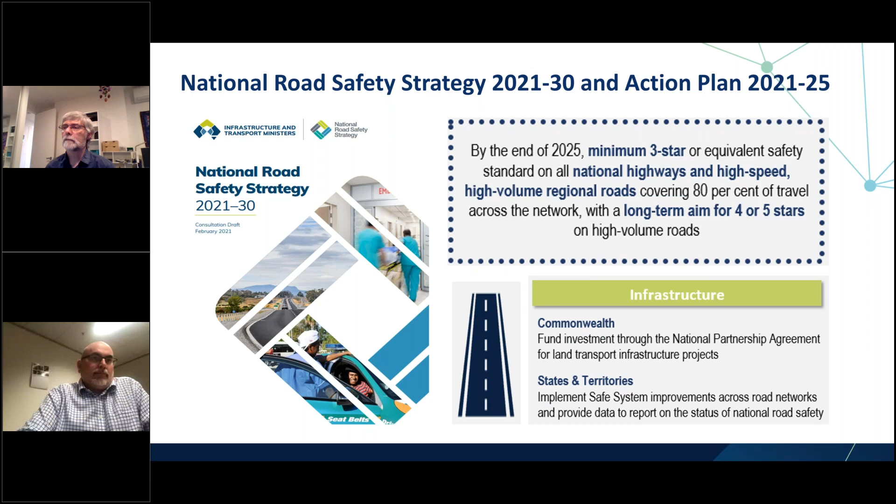As part of trying to establish baselines and understand where we are at now, the Commonwealth has stood up the National Road Safety Data Hub. And as part of that, you can see that data is key. It's a key feature to help us actually understand where we're at and to understand the gaps and the measures and the investment that we need in order to get to where we want to go.

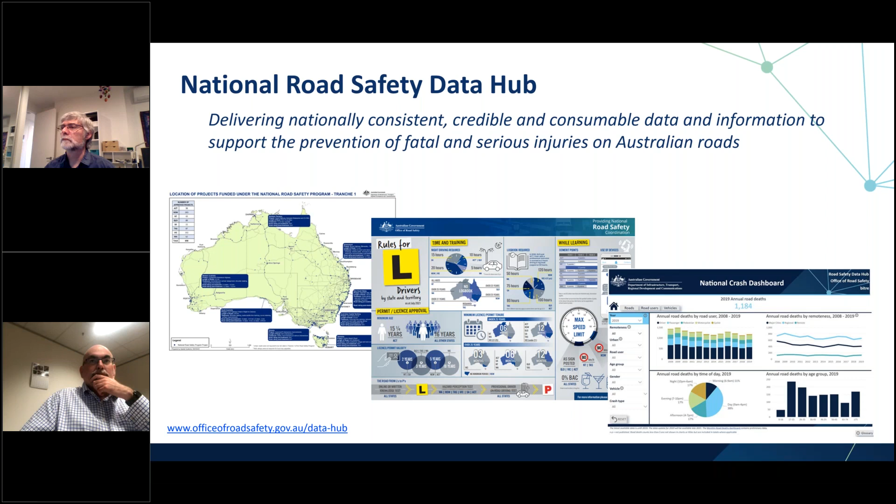So now I'm going to start throwing questions to Mark, given he's head of the road safety program. And Mark, first and foremost, perhaps you might like to actually tell us what's the basis of standing up the road safety program?

So, Gabby, as you mentioned, we're implementing the new strategy and action plan, and with that, we've got a large legacy network that has become or is ill-equipped to meet all the expectations that we have of road safety going forward. The goal of the program is to retrofit the highest risk regional corridors with low cost, easy to implement safety interventions, and also in urban areas to look at providing greater protection for vulnerable road users in those spaces. So things like shared paths, separated bike paths, etc.

We've got an aim in the program, as you mentioned, is to lift all the roads to a minimum of a 3-star safety rating, and we'll talk a little bit later on how we look at that safety rating and assess it from what we get from the states. The other important part of the program is making sure that we get a good geographic spread of the works so that they actually are spread across the entire country and also in regional and urban areas.

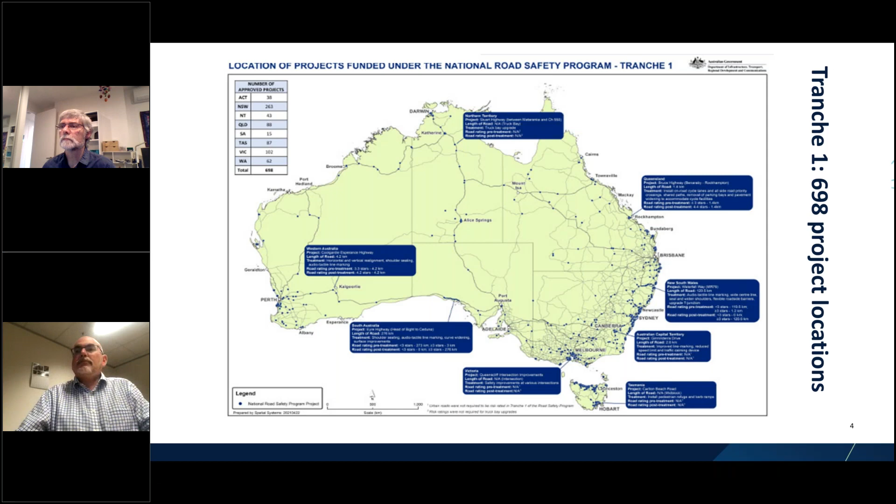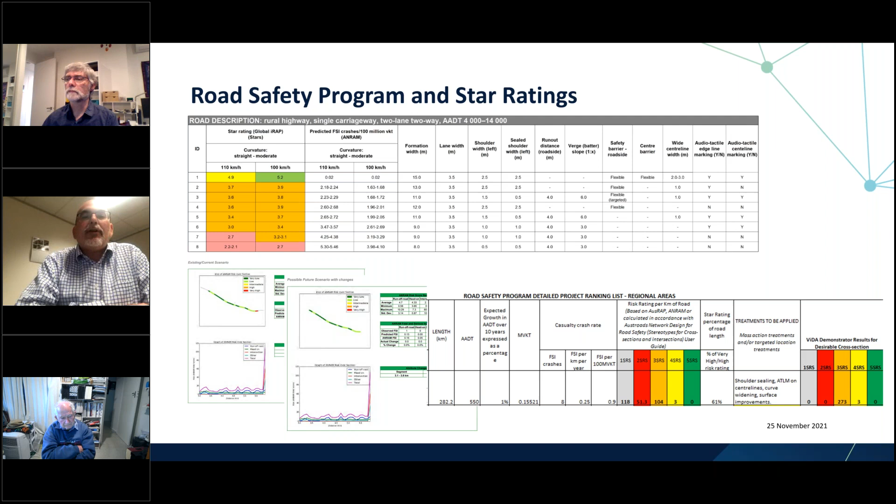I think it's worth noting there's been huge interest from the Parliament and the Joint Select Committee and the Senate around how this program is operating, and about the types of savings and the best opportunities to reduce fatal and serious injury crashes.

Yeah, so at the end of the program, at the end of each tranche, we expect a post-completion report to be provided from the states and territories for the works they've done, basically to show us that they have done what they said they would do.

What we're asking in that is, when they put in their bids for the work, they provide us their before assessment of the crash risk, then provide the after assessment. But again, that's before the work has been done. So we're also asking, once you've completed it, do another risk assessment so we can see whether you've actually met those star ratings, or in some cases gone higher, or whether more work needs to be done to increase it.

And could there be an actual spot issue on the corridor as well? This one is a good example.

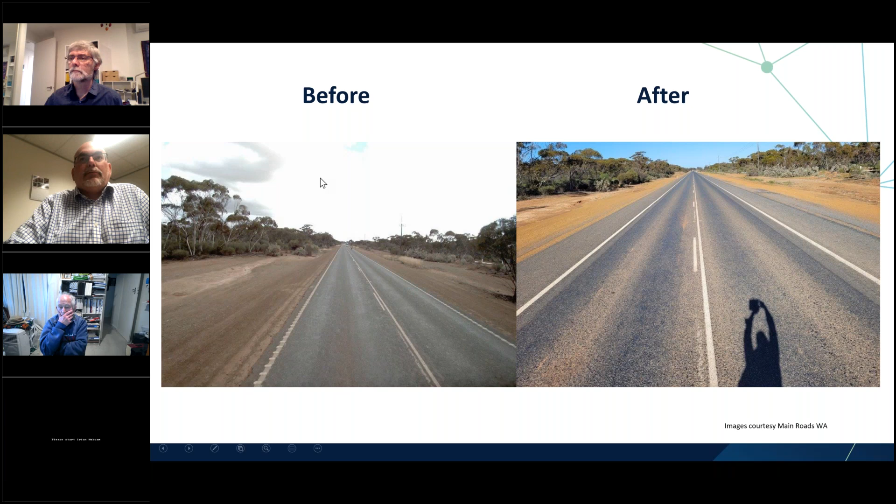Thanks, Mark. There's a comment there from Max Cameron about if sections are not chosen by BCR analysis, how can the program guarantee value for money? I think it's really, you know, some of these have a high crash risk, but don't have that crash data to back it up.

We're looking at the collective risk. We're not looking at black spots - there is a black spot fund. So this is about saying we know with this legacy road system, the risk is high. The crashes that happen are quite random, the fatal crashes. So what we want to do is overall reduce the risk and improve the service of the road, broadly. So that's why we're not putting a BCR on it, and otherwise some of these roads would never get funded, and yet you can see the huge lengths of kilometres being done with the availability of this funding. So we're really proud of that, and we really want to move, not just from 3 stars but higher than that, but obviously that's going to take time and there's a huge number of kilometres to go.

And just on the value for money, Gabby, I think there's two factors in there. There's the BCR, we've shown the value for money, but there's also, we do assess to make sure that the works themselves that are being proposed and the cost of those works are within a value for money estimate as well - from a more general procurement side, that the value for money in the works actually being undertaken is correct.

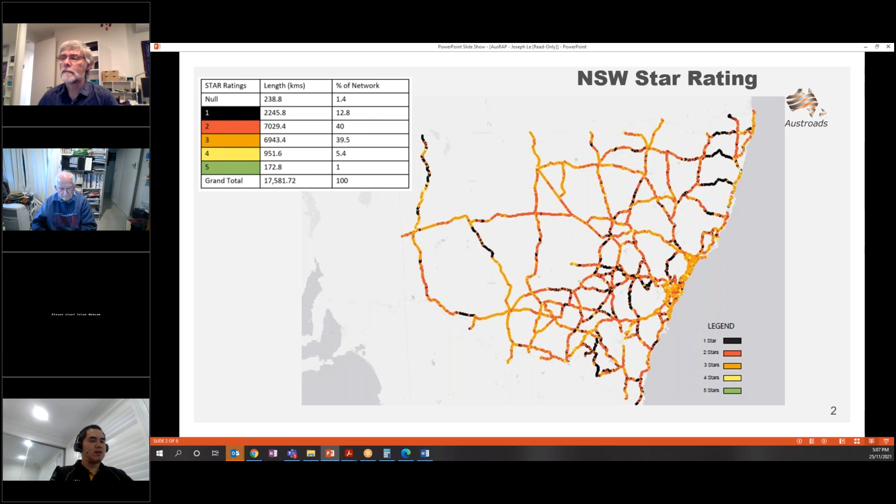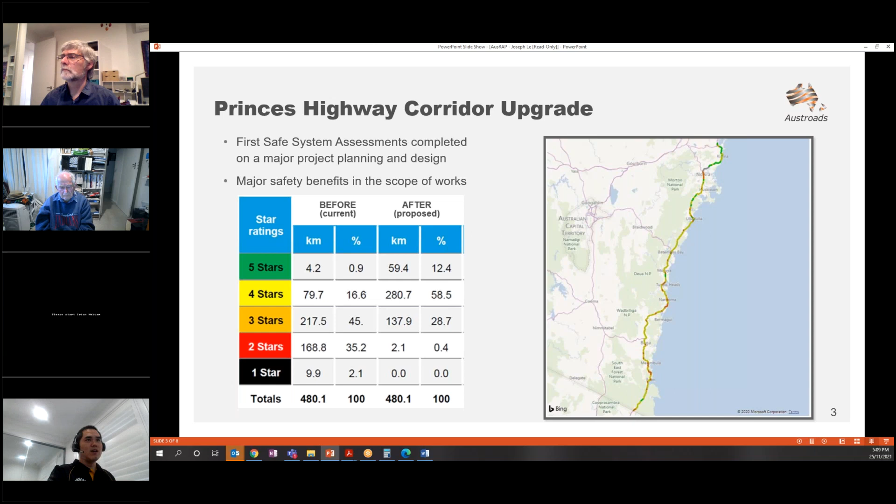One of the most straightforward ways they can do that is through this risk rating process using the star rating methodology. So we have a couple examples here. These are projects funded through our Safer Roads program, a much smaller program in terms of dollars, but again reiterating that route-based approach. The Sturt Highway, from essentially Hume Highway near Wagga to Mildura, which is the Victorian border, over 600 kilometers, we're removing all 1-star roads and reducing the 2-star roads on the road network there.

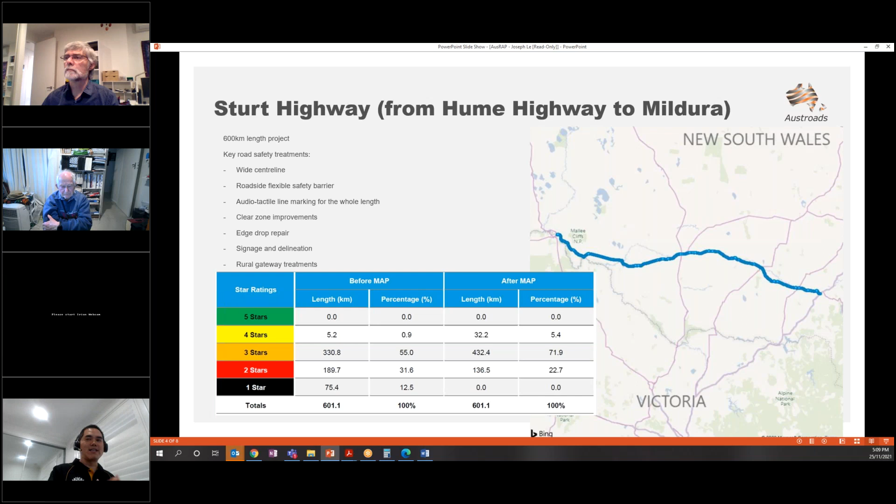You can see some of the treatments that we're installing: wide centerline, roadside safety barrier, audio tactile line marking, clear zones, signage delineation, rural gateway treatments. This is a mass action type project and another case study of how we've assessed the benefits of our program based on star rating. I understand there's a question about BCR previously, and this is one of the ways that we can justify the investment.

So I'm just going to circle back to the Princes Highway for a moment. One of the other applications of star rating that you're going to see more of is around how we determine suitable cross sections. So that project that was mentioned a little bit earlier from Austroads - what this allows our planners and designers to do is basically understand very quickly what sort of cross section they want to implement, so that we can scope, do investigations, costings, estimates, etc., and even public consultation based on an understanding of what the cross section is going to be.

So to achieve the star ratings for the Princes Highway, especially the higher order star ratings, we're adopting this higher order cross section, 2+2, on the busiest section of the road network of the Princes Highway, and that essentially goes from the south of Sydney down to Jervis Bay Road. Then the next section is from Jervis Bay Road to Batemans Bay, and that's got a higher order cross section as well. Then you can see as the demand drops in vehicle traffic a little bit further south, the cross section changes again.

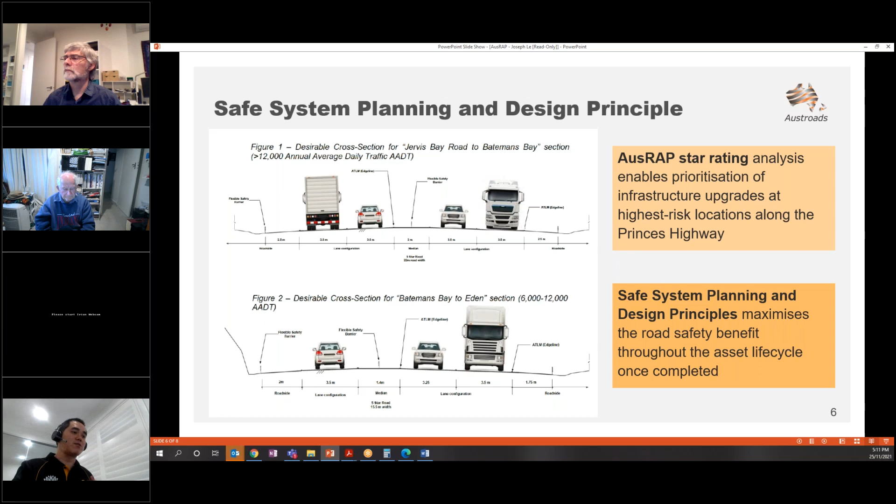So from Batemans Bay to Eden, you'll see that it's a 2+1 configuration, based on trying to achieve the maximum star rating possible. Now this is obviously a planning and design stage project, and when we go into construction and development there are going to be modifications made. But one of the system changes and cultural changes this will bring is that we get people to start thinking about the ideal safety cross-section from the start, as opposed to building the cross-section and trying to retrofit the safety treatments after. Our past lessons have shown that doesn't yield the greatest safety benefits.

These are just some acknowledgements from the Princes Highway team that have worked with us on the program, from the program director and lead project developer. So I'm not going to spend too much time on this one.

I wanted to talk briefly about additional projects at the end. Right now we have 18,000 kilometers of road in New South Wales already assessed, and we're currently going through a process to assess a further 19,000 kilometers of regional road network. That brings us up to about 37,000. As I mentioned earlier, we actually have 220,000 kilometers of road, so the gap there is really around the local road network, and we fully acknowledge that.

Now we've looked at ways to survey and code the local government road network using the current methodology. Essentially we found that across local government there's inconsistencies in how asset data is captured or whether it's transferable to the methodology. So what we're working on at the moment is a project we call AIRAP. It's an iMove project, so we're working with a lot of partners, including IRAP themselves, UTS's technology, and DDT and TomTom, and essentially what we want to do is leverage off market products that are out there.

So many companies have existing LiDAR databases that are very rich in data, and they drive your GPS and similar technologies. So we were wondering if we could take that data and have machine learning, artificial intelligence, applied over the top of that, and find a way that they could code this methodology for us. Now the intent and remit I've given to the project team is to ensure that it's reliable, scalable, affordable, so that we can roll that out en masse.

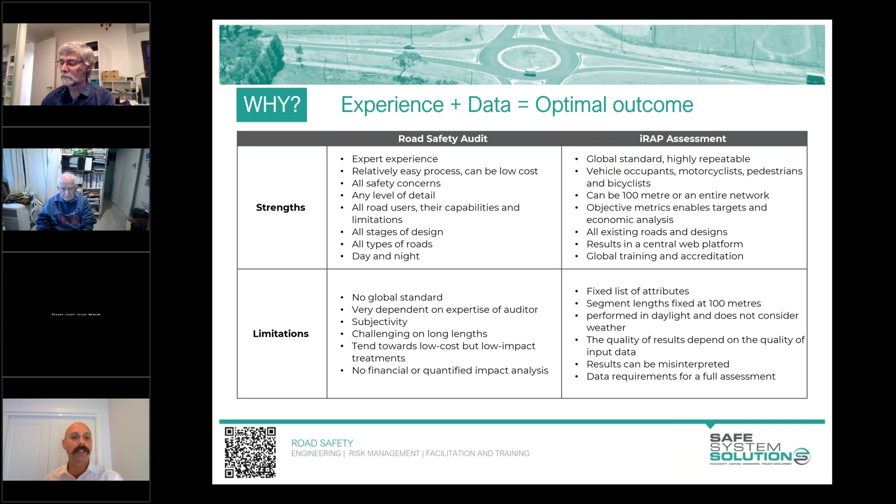There's a lot of variability depending on the expertise of the auditor and sometimes what they want to focus on. There's quite a bit of subjectivity often, and that can be advantageous in terms of expert opinion, but sometimes it presents challenges. It can be challenging to do long lengths in the audit process. It can be done, but can be very, very challenging sometimes.

And this one, the tendency towards low cost but low impact treatments. Now, that is a generalization, but there are a lot of audits out there that tweak around with signs and lines, and that's pretty much the majority of the audit, where there are some pretty fundamental risks on that road that aren't being reported on. Now, you might say, well, that's an inadequacy of the auditor or the training or the registration or whatever it is.

We do see a fair bit of that out there, unfortunately. And there's no financial or quantified impact of recommendations if you're in a jurisdiction that does recommendations, which is everybody except for New South Wales. And then if we look at IRAP, there's a fixed list of attributes, so that's a bit of a limitation.

I mean, there's a lot of attributes, 60 something, I think, that are inputted to get the risk rating. The segment lengths of that 100-metre segment that gets a score. It's usually performed only in daylight and in particular weather conditions. The results depend on the quality of the data input, and I'll get back to that.

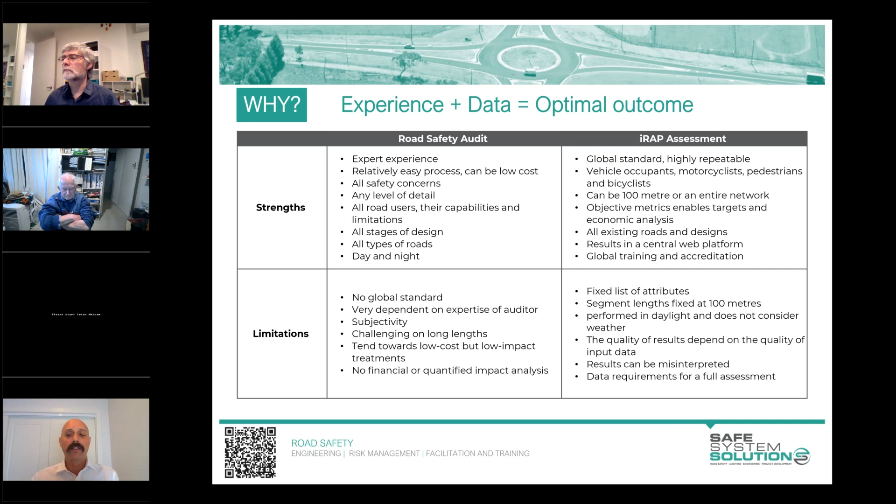So, like anything, I think the best way to do this is through an example. The way this came about was the Asian Development Bank engaged IRAP, the organisation, and Safe System Solutions together to come up with a process termed Star Ratings for Road Safety Audit, and got input from world experts in road safety auditing and the IRAP methodology, people like Matt Chamberlain, Phil Jordan, Craig McMillan, Daniel Lasada, Mike Dreznes, and lots of others who provided input into the methodology and how it would go about. So it's quite exciting.

But let me just jump into an example so you'll see visually how this could play out. I'm going to do the most simple type of star rating for road safety audit, all right? It's what we call a level 1. And I'm going to do it with this sort of hypothetical example here.

So a road design is prepared, and it's got a flexible barrier system or a semi-rigid barrier system transitioning into a rigid bridge barrier system. This is part of the design. And so just like a normal road safety audit, the team would review the designs, looking at the designs. They get out and they look at the site, daytime, nighttime.

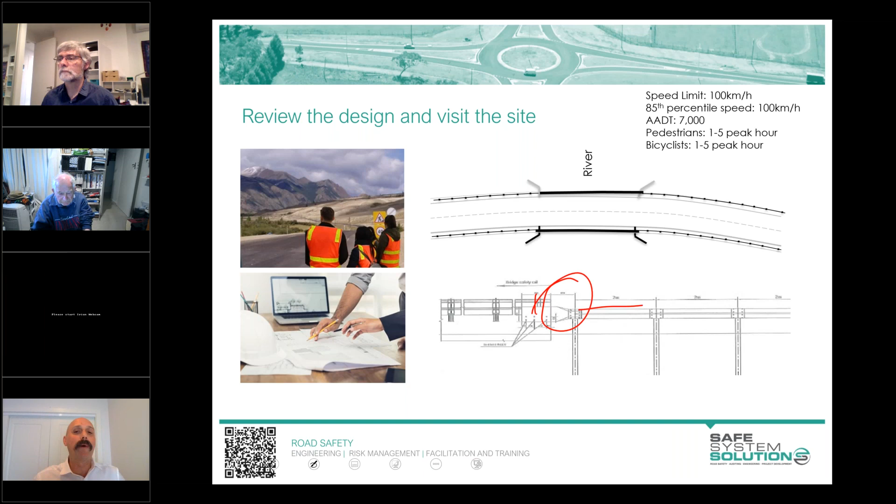So we're going to, and many of you auditors are already no doubt seeing this, have a potential pocketing scenario where the deflection of the one barrier system will deflect a bit, and we'll see some sort of potential pocketing into the more rigid barrier. And that can play out in the scenarios that you can see the aftermaths here, where the vehicle has obviously gone out there and there's been an incident.

So like a normal road safety audit, the auditors have seen this in the design and they risk rate it, using the risk matrix that's available in Austroads' Guide Part 6A or whichever your jurisdictional one is, and they think about, well, what's the frequency of this possible crash at this specific location?

What's the severity it will likely result in? And maybe for this one, they say, well, it's improbable for that one, but it's going to be serious, so let's go medium. We can debate that a little bit, but let's just keep moving on.

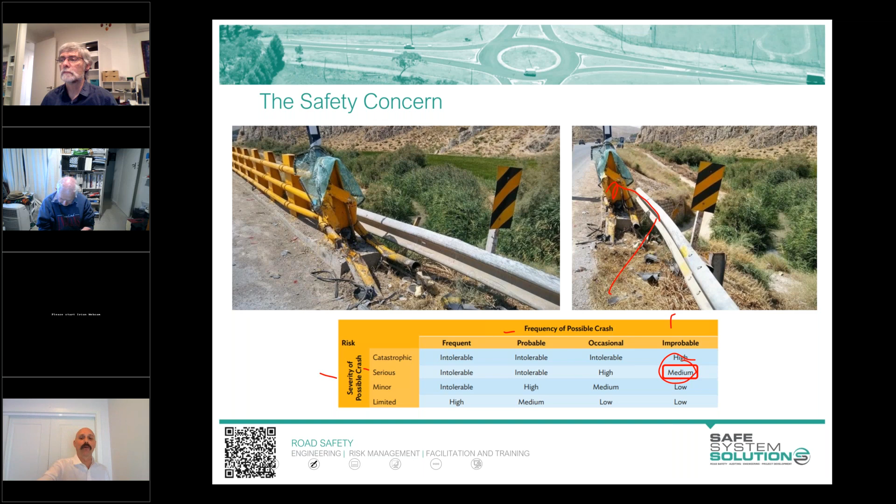So then a road safety auditor will write this up. I'm not going to go through the details, but writing up the explanation of the risk and some factors in there, a little snip of the design is always a good thing. Risk rating it. Some jurisdictions or some auditors like to put a safe system energy component there, talking about the crash they're thinking of, and is it above sort of what the body can withstand in terms of biomechanical tolerances.

The next little bit is the new stuff, so that's sort of run of the mill. There is then an initial star rating done of that particular section. Now, how do you do that? Some of you know how to do it, but it's actually quite easy, and people get scared by this a little bit. But it is free, and it's through the IRAP website utilizing ViDA. Absolutely free to access this. You just got to register, and it's really a wonderful tool that we want people to be getting involved in. So you register for that.

I've put the website there. You can find it just by Googling IRAP as well. And what you do is you jump into that, and it'll take you into something that looks like this, and you'll have some tools available to you.

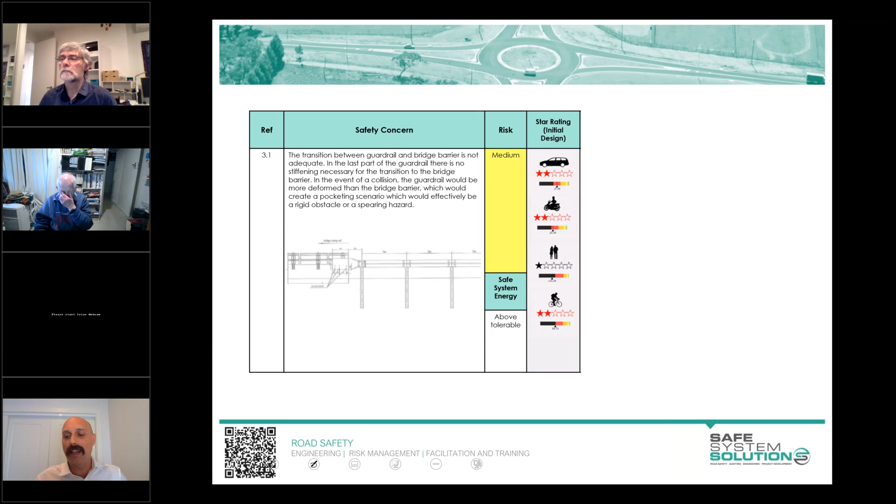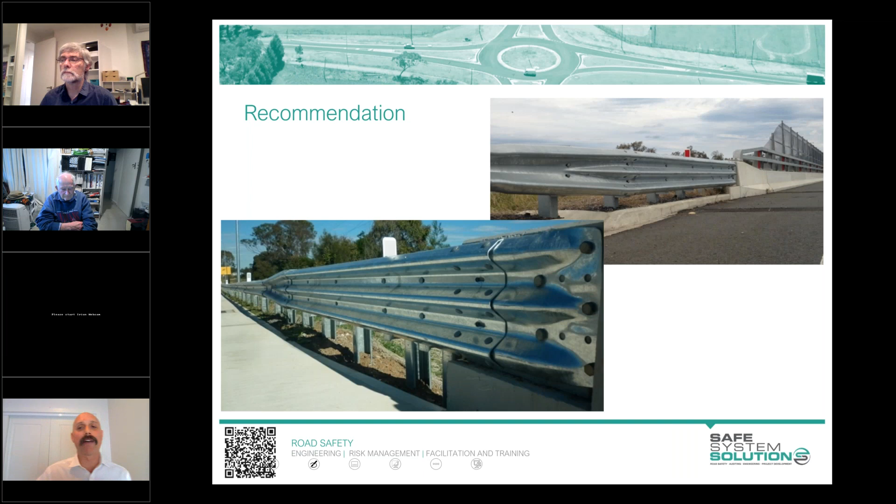Then, of course, you go to a recommendation. So how can this be improved? Many of you will know you want to transition that barrier system to the more rigid system, and maybe tighten up post spacings, have an approved transition - Austroads has just released some more of those.

But that recommendation is made as it would be in a normal road safety audit, with a nice little picture to show whoever's reading it what we're thinking about. But then that is also star rated.

So this then goes back into ViDA, the little bit of software. You change that hazardous end to a barrier system, and you then produce a star rating for that.

You can see there the differences just from that change - the passenger vehicle has improved up to a 3-star now. It's actually had quite a significant improvement if you look at the numbers. The motorcyclists have had an improvement too - they stay within 2 stars, but it's important to note there has been some improvement associated with that. This is all going on in the background in the iRAP methodology, calculating this. Pedestrians have not changed and cyclists have not changed - that alteration is not going to influence that.

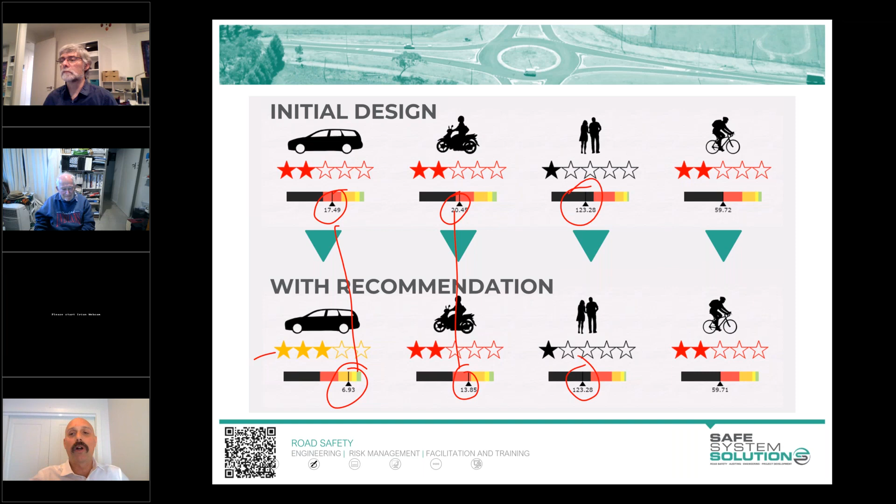And so then that's put into that road safety audit report. So that then becomes your finding.

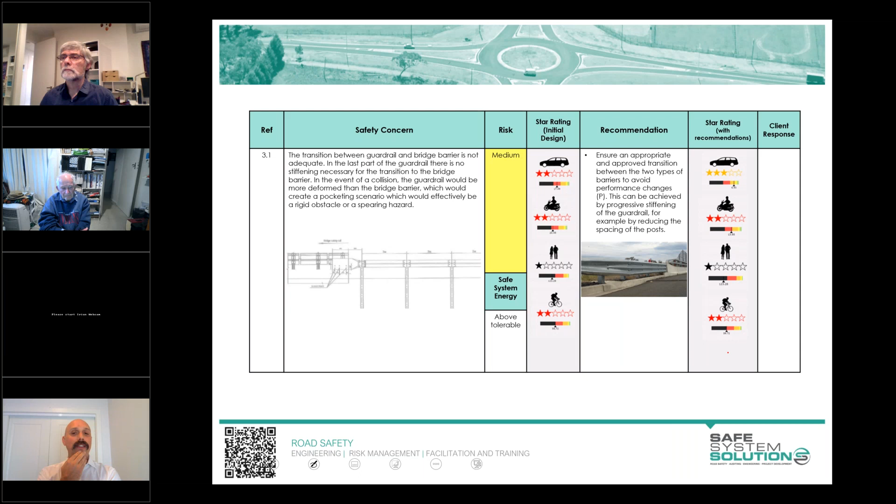Now this is really exciting, I think, for a number of reasons. First of all, it's a pretty good way to communicate, to tell a story, exactly as Gabby said, telling a story using these stars. It's always a great way to say, well, if we fix this we get a great improvement, or we get improvement here and a bit of improvement here. But it's a little reminder that there's still some issues going on for some other road users that might need to be considered.

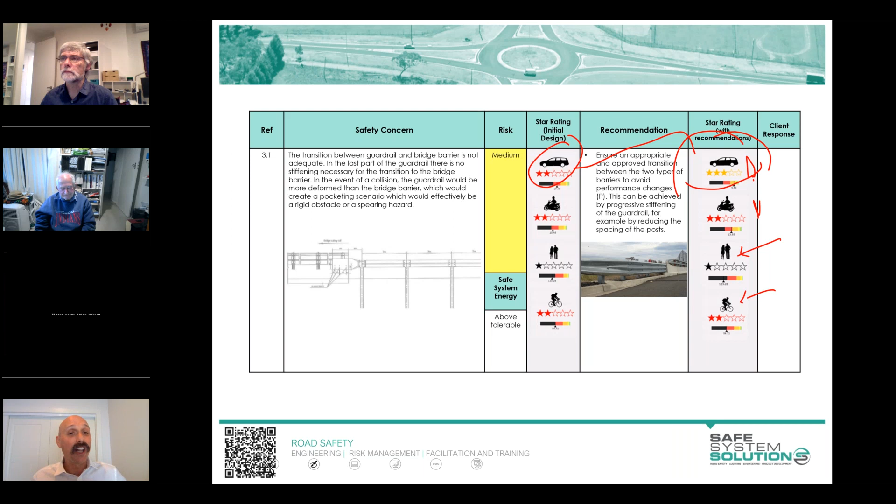Now that'll be a holistic thinking of the project and everything like that. But often, the audit has picked a few issues like this - they are rectified, but we're still left with this road with a lot of inherent risk in it.

So that's what we call level 1, the simplest one. I really think we can just be doing that as road safety auditors with not much training - a little bit of training to understand how to use the demonstrator tool - and it's giving a nice snapshot. In audit teams, I've been using that not just within the recommendations, but also to communicate scenarios to clients that would give much better outcomes.

I was doing one with a colleague on a local government high-speed road, and recommendations were made, but it showed that even if you get all the signs and lines right on this road, it's still 1 star. Because they're expecting audit reports with signs and line improvements and the like. Of course, then you're putting in other things to show them what it would be required to get to a 5-star or 4-star road.

Yes, some are way out of their budget in terms of barrier systems and the like, but altering the speed becomes really clear to them as a great way to get really big increases in star rating without the big expense from an infrastructure perspective.

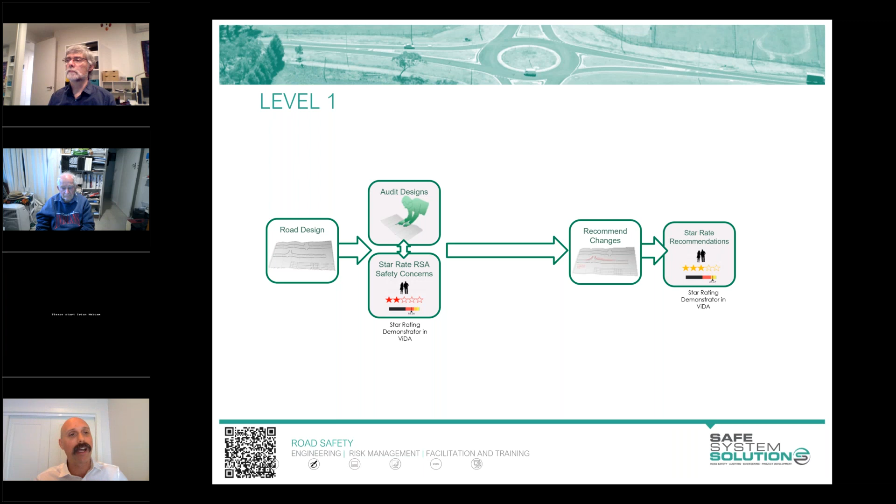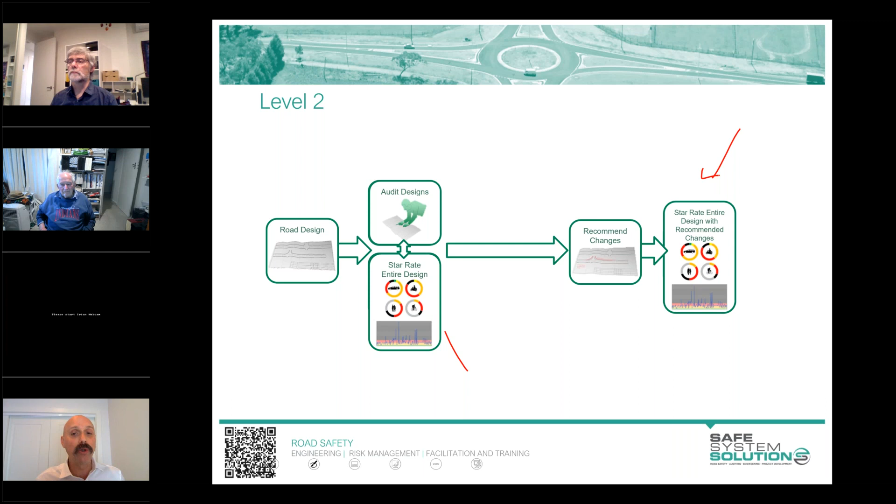So that's a level 1. A level 2 is a little more complicated, a little more to it, and it goes through star rating the entire design and the entire route as a baseline, and then star rating it all again at the end. You still go through that star rating of different specific issues as you go through it. I'll show you very quickly some of the advantages of this.

There's a little more effort to this. You might be, as an auditor, given a risk rating report, a star rating report, might look something like that - a risk worm. You can utilize that to identify immediately some areas you might be interested in looking at in more detail as an auditor, but not to say that you don't want to look at other areas as well - it can help you out a little bit that way.

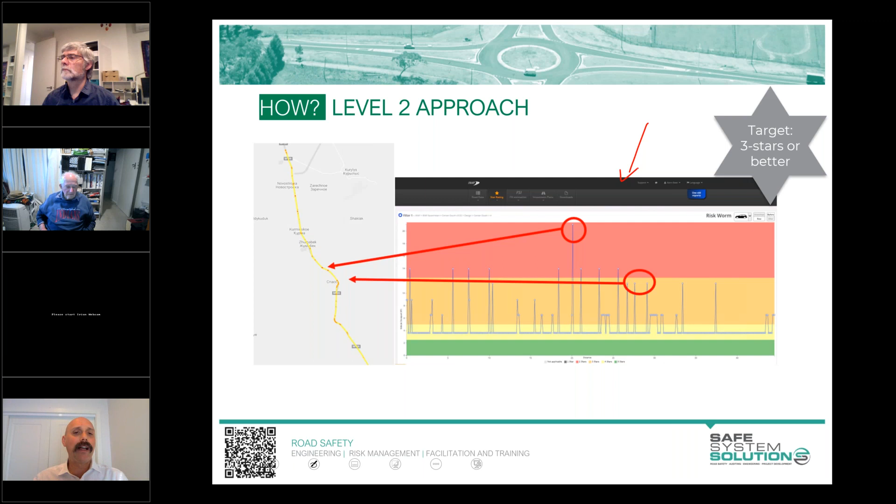You can also get lots of good information out of the IRAP system, the ViDA system, on particular types of crashes that are contributing to risk, and utilize that to identify areas. As an auditor, you might be very interested to find out what's going on in some of these areas. So it's helping you with a bit of filtering already.

I do always warn, though, you don't want to be just fully driven by that. As an auditor, we're looking for things that might sit outside of the risk rating methodology. That's actually a thing we call situational scrutiny in the manual, which is about how the auditors, utilizing their experience and the like, can add a heap of value to the IRAP coding as well. But I'll get to that if we have time.

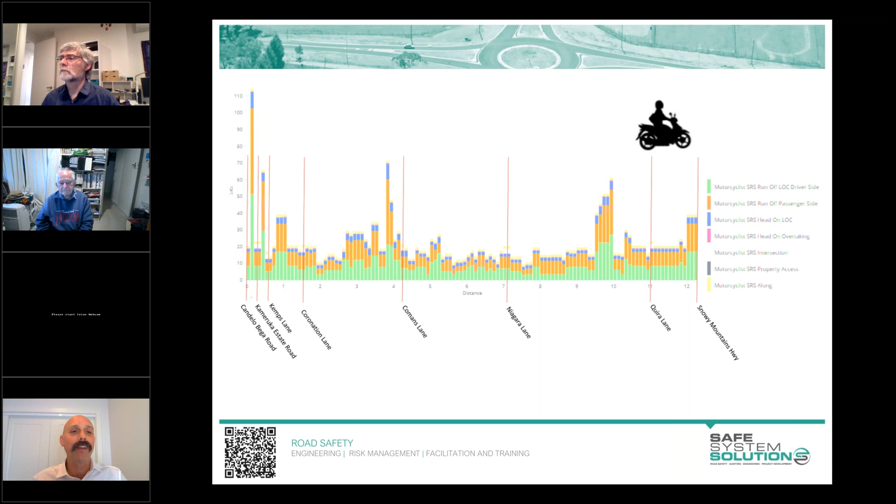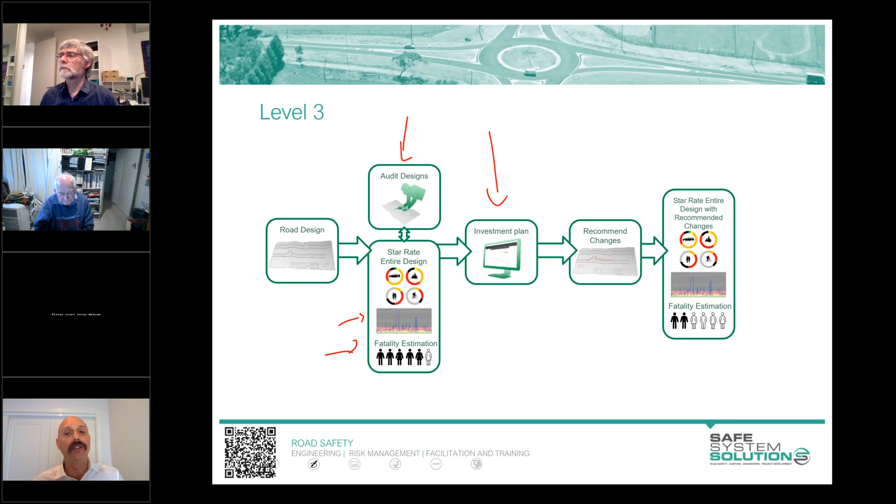Level three is, I suppose, the comprehensive one, the highest level of star rating for road safety audit assessment. With this one, you're still doing that sort of audit process and getting star ratings for the design and each issue, but you also can get fatality estimations. Again, that can come out of the ViDA system or the star rating system, the AusRAP system. It can also produce investment plans, which is indications of what could be implemented or what the system is generating as ideas for you to implement to get better star ratings, recommendations and fatality estimation. You can see there, a before and after of what is expected in terms of savings of death and serious injury, which is quite exciting.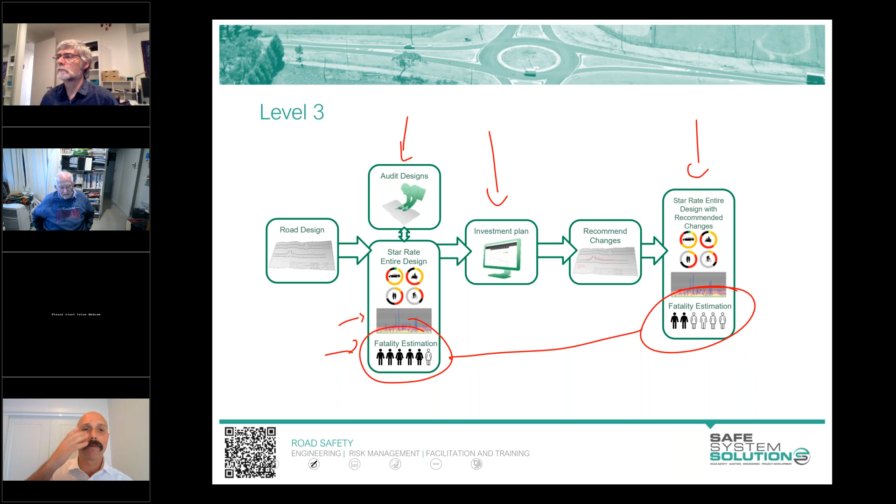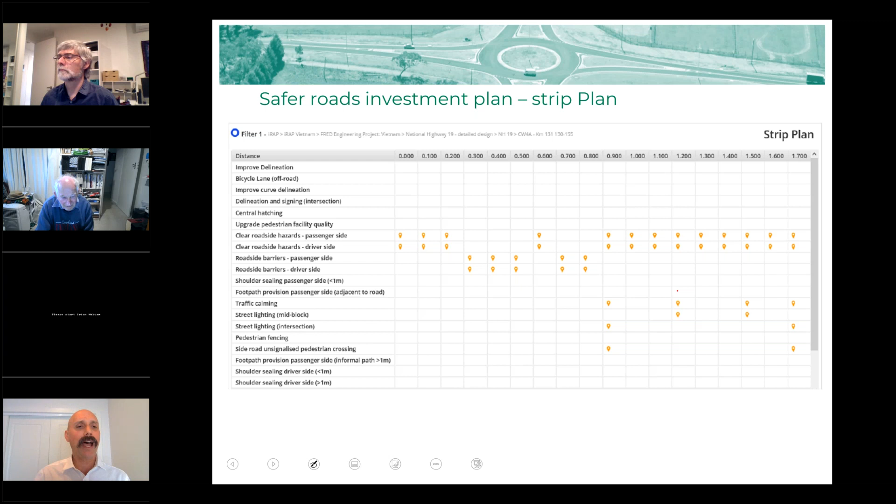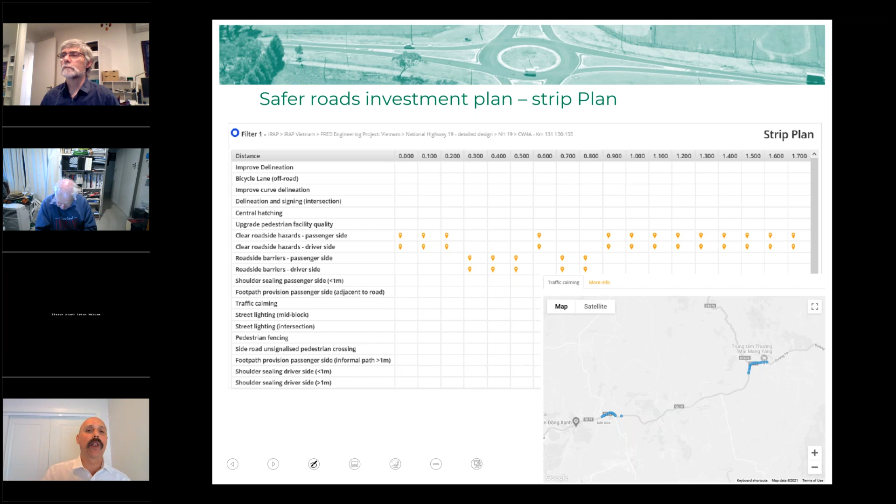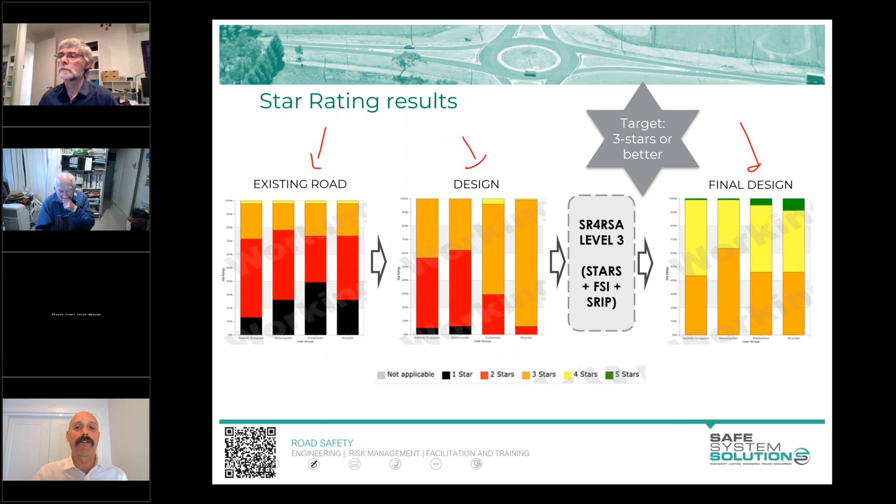So the investment plans come up with lots of different ideas, and they can be taken on. As an auditor, you can use some of those in your thinking about recommendations and looking at areas of risk. It comes with GIS maps and the like, and you can utilize outputs for showing existing road, with red being 2-star, black being 1-star - showing the percentage improvement in the design and then the final star rating after going through this process. I talked there a little bit about the ability out of the system to predict reductions in death and serious injury. Again, this is a pretty wonderful communication tool for everybody to be able to see how many lives are being saved by alterations to the infrastructure.

We've got here some sort of pedestrian overpass over a hypothetical road. Now, when you go into star rate, you've got to put a choice in. You've got this proposed pedestrian overpass structure, and you sort of scratch your head at that, and go, well, yeah, that's in there. For pedestrians, the IRAP methodology is really going to say that all the pedestrians are going to use that, and it gives you 5 stars immediately for pedestrians. But the thing is we need to understand - are all the pedestrians going to use it? This is where road safety auditors are really fantastic additions to this process, where they can see the pedestrian desire lines, or reasons why they would or wouldn't be going up there, or cultural reasons or the like. This is an example of probably a little bit of a limitation at this stage in the star rating methodology - in theory it's all good, but it could be coded either way. So that's one example where the auditors are injecting wonderful information into the accuracy of that star rating.

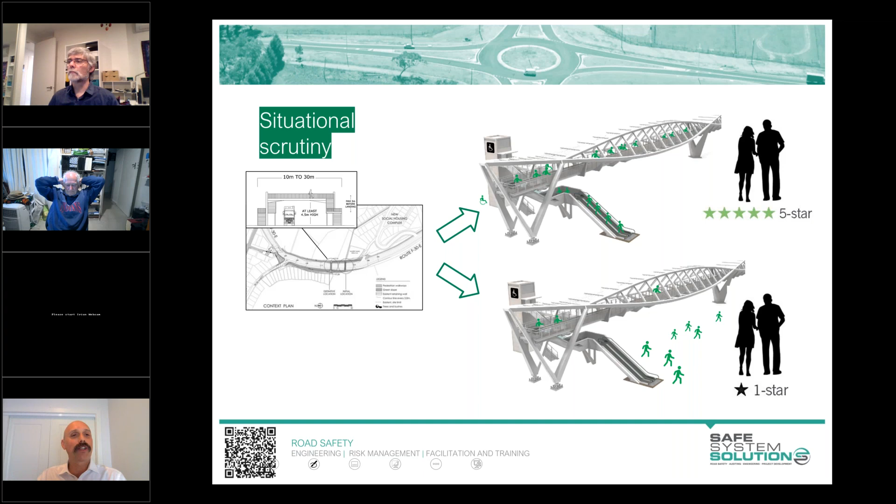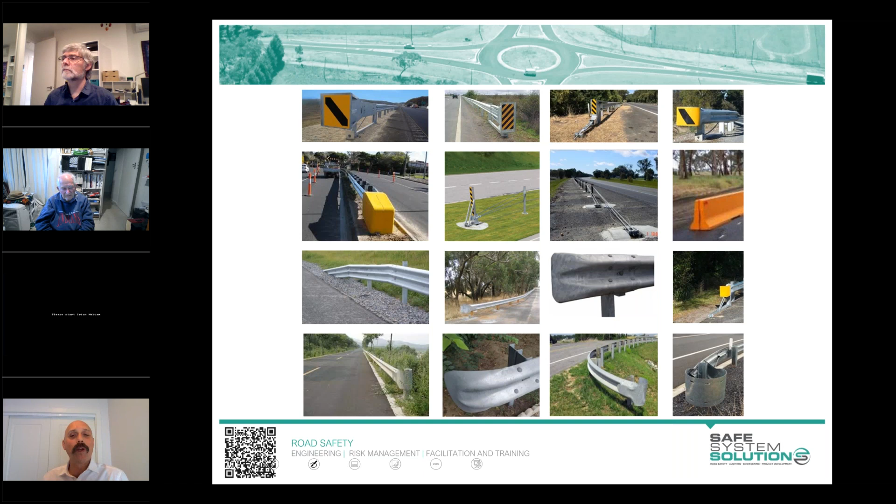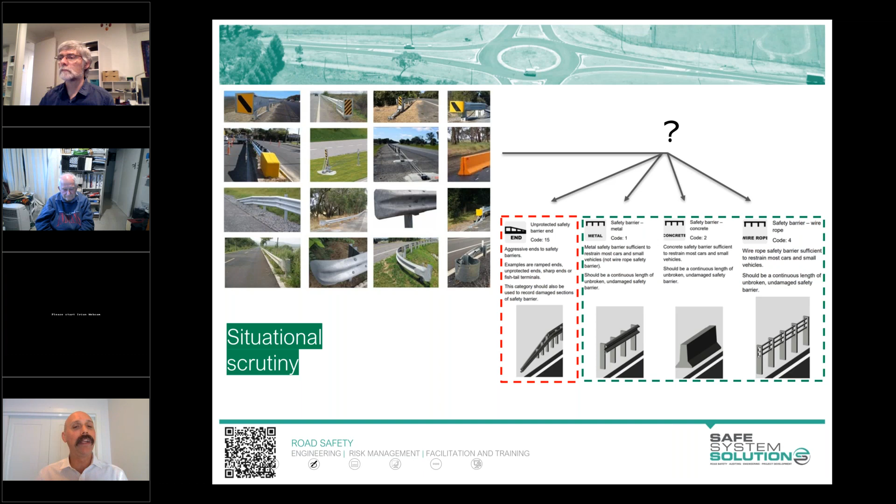Another one would be barrier end terminals. We were talking a bit about barriers on that last one, and the amount of end terminals out there is just huge around the world - you see them as you're driving around the network or walking around here in Australia. So which one do you code into which category? You can really code barriers into many different categories - if end terminals are appropriate, they'll be categorized into one category, and if they're not, they get into another category. Again, somebody with expert knowledge around this, a road safety auditor, can be adding that value to get the correct coding and appropriate star ratings out of that.

Just one or two more here. Another exciting situational scrutiny one is the use of pedestrian fencing. When you're coding in IRAP, you're either going to have pedestrian fencing as present, which gives really big benefits for pedestrian safety, or it's not there, and it's probably baseline. So that's factored in, but they're the only two choices.

A road safety auditor, as many of you would know, can identify that a pedestrian fence can trap pedestrians onto the road. They could be trying to cross in a particular desire line, and walk a little bit along the road because there's a pedestrian fence there, and in they go. So the design of something like that could actually increase risk. Now that's not able to be coded specifically in the star ratings at the moment, but that's something an auditor could be picking up.

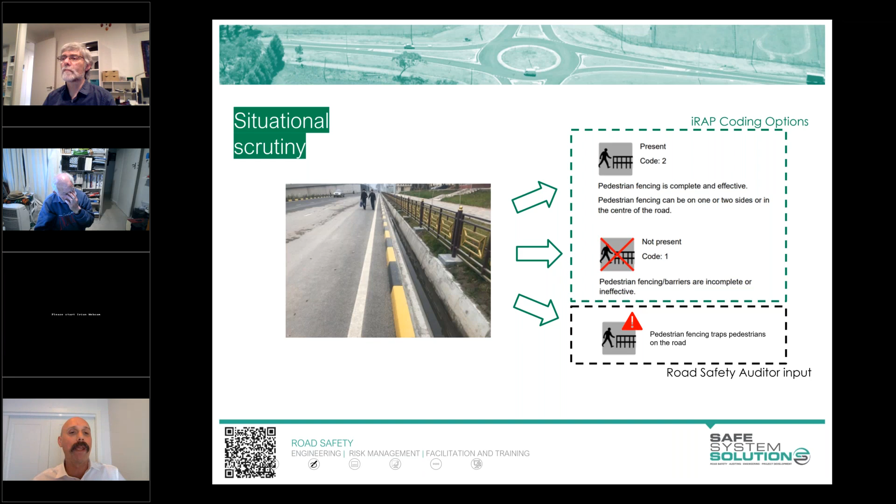And there's a few more like this, where we see things like line marking that may be misleading, increasing a specific risk like that. Again, not something that can particularly be coded to get that star rating change. It's either just poor or adequate in your coding options within iRAP or AusRAP.

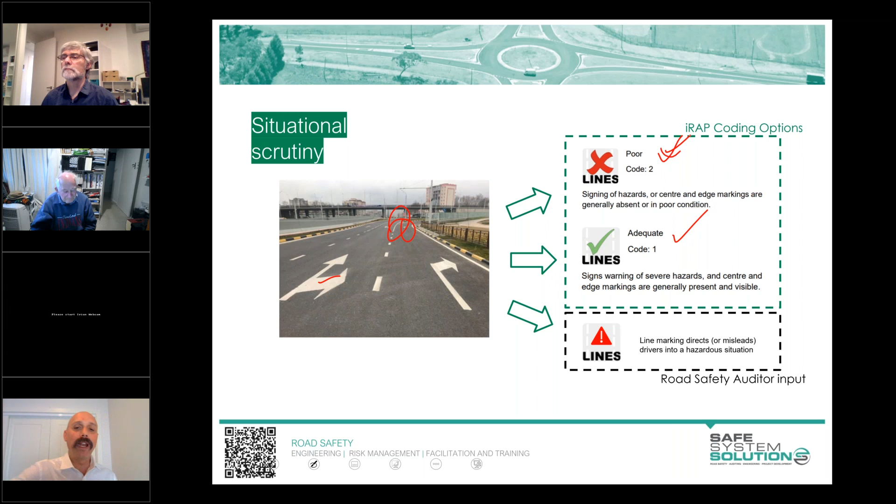So like this one, you see a right turn arrow from a lane that doesn't actually have the ability to turn or to go off the motorway here. So we're going to have a pretty nasty scenario going on up there. IRAP would just simply code that as probably poor line marking, although in IRAP it's a bit more around the legibility or the ability to see it, how clear it is, and the like. But still you'd probably rate that poor, and it's hardly going to alter the star rating at all with that change. But we know as auditors that's a big issue that needs to be rated accordingly.

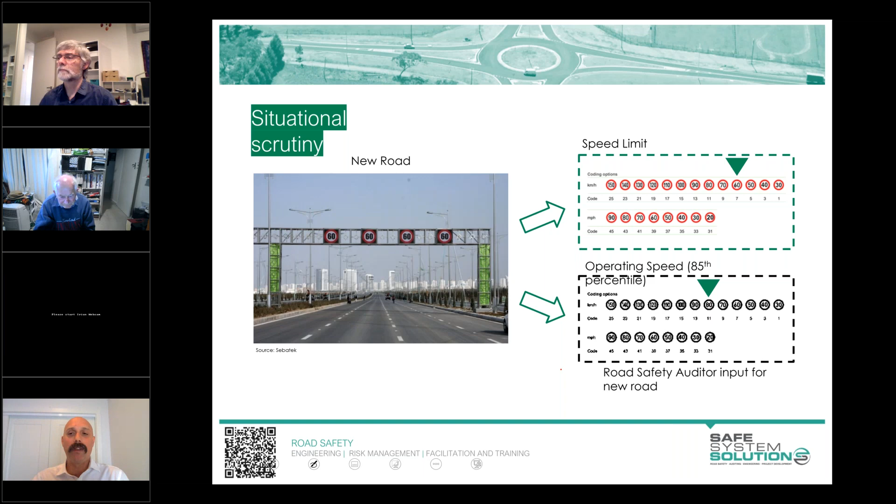And also things like new roads and speed limits and operating speed - you don't have the ability to check data on that, so you've got to make predictions. And if you really don't think people will be following that speed, that can be coded in accordingly.

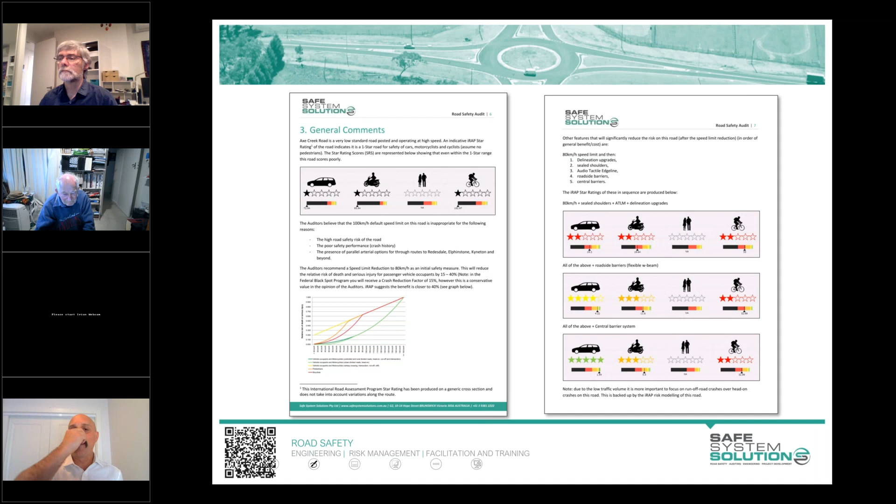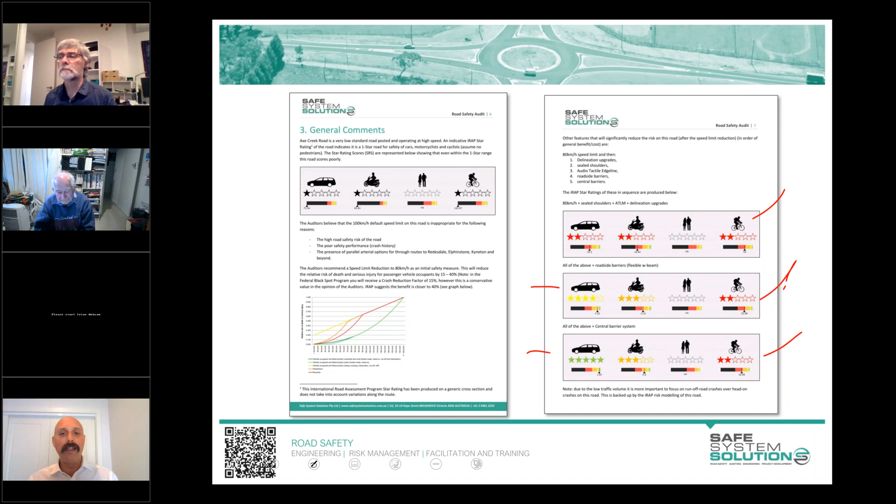Just an example of the way this can be used very quickly, very easily, very cheaply by road safety auditors. I showed you the tables, but it could also be general commentary around scenarios that would change risk profiles. As I mentioned, this was for a local government road, high speed, just showing scenarios that would be needed to get star ratings up. And it's pretty exciting that this can be done very easily and cheaply, and be something we can really be providing that advice on.

I might stop there. I've got more slides, but I think there are a few questions, and it'd be good to get a bit of discussion going on. I will briefly talk to this.

We've got lots of tools: safe system assessments, black spot investigations, network planning, audits, star rating - they feed in at different points, and it's about taking on which one is appropriate for which time. It's not to say abandon all safe system assessments or abandon all road safety audits and only go to this. They all play their role at different times.

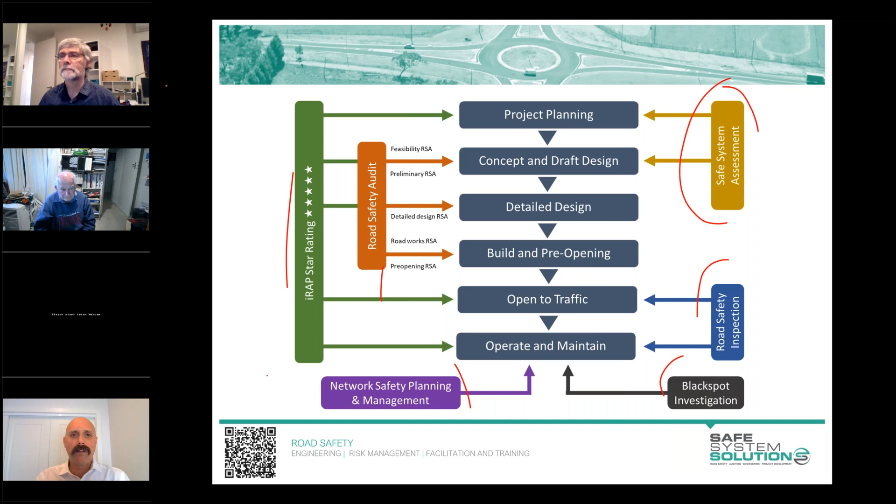Okay David, I'll hand back to you. I can't quite work out how to... oh, there we go. Good, thank you very much Ken. Thank you for your presentation.

There's quite a discussion happening there about why we got a 1-star rating for pedestrians when the treatment was about barriers on the bridge, and there's probably very few pedestrians there. So if you'd like to read through those comments, because it's a whole conversation happening there, and we might come back to that question. In the meantime, can I throw to Mark or Gabby to comment on the first issue in our chat from Brad Spalding about wide centre-line treatments and barrier treatments, which will probably take more than 6 months to develop and deliver. So the 6 month issue comes up again - would you like to comment on that some more?

Yeah, thanks. Happy to. It's Gabby here.

I understand that 6 months is a very short time frame, and what we're finding is that states are investing in planning and design upfront, because the purpose of this program was to have shovel-ready projects. So we're finding a greater investment in planning and design, so that states have plans ready and a number of projects scoped out and ready to go. This has also meant that chief executives and agency heads are now seeing road safety as a priority, with a need to understand the network, the gaps, and what they would need to do and how long it would take to scope things out. So that's being addressed within agencies, but the program is really designed for shovel-ready projects based on the fact that it was a stimulus program.